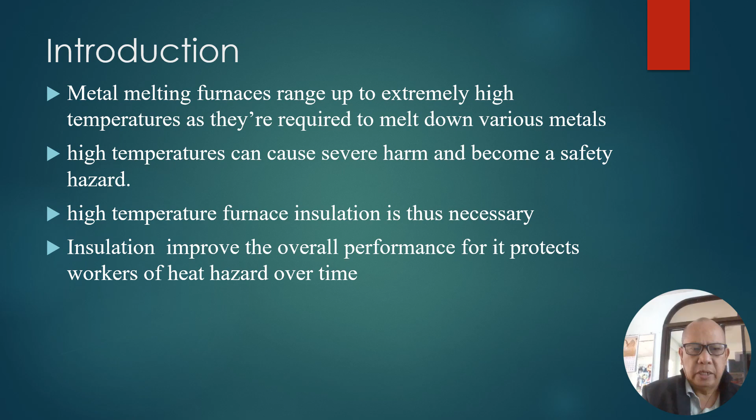Metal melting furnaces range up to extremely high temperatures as they are required to melt down various metals. High temperatures can cause severe harm and become a safety hazard. High temperature furnace insulation is thus necessary. Insulation improves the overall performance for it protects workers from heat hazard over time.

Coir, which is derived from the coconut, has some unique characteristics such as its resistance to seawater, microbial attack, high impact, etc. Its low thermal conductivity or high thermal insulating property makes it suitable for being used as insulators, although its main weakness was that it's easy to decay, but this can be solved by applying a treatment process.

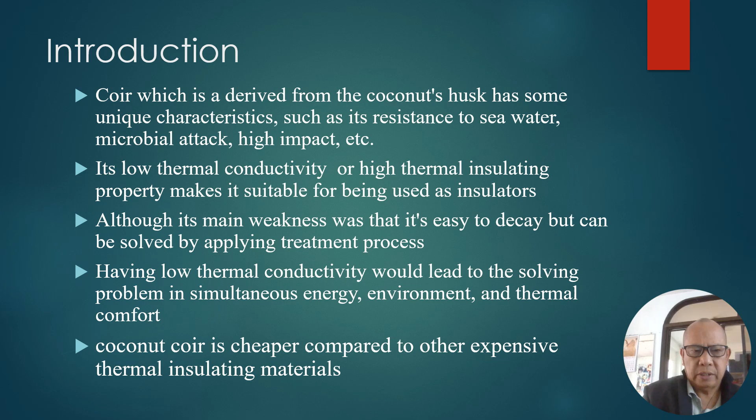Having low thermal conductivity would lead to solving problems in simultaneous energy, environment and thermal comfort. Coconut coir is cheaper compared to other expensive thermal insulating materials. The general objective of my study is to determine the effect of coconut coir on outside temperature and humidity of a mini metal melting foundry furnace when ignited with used lubricant oil as fuel.

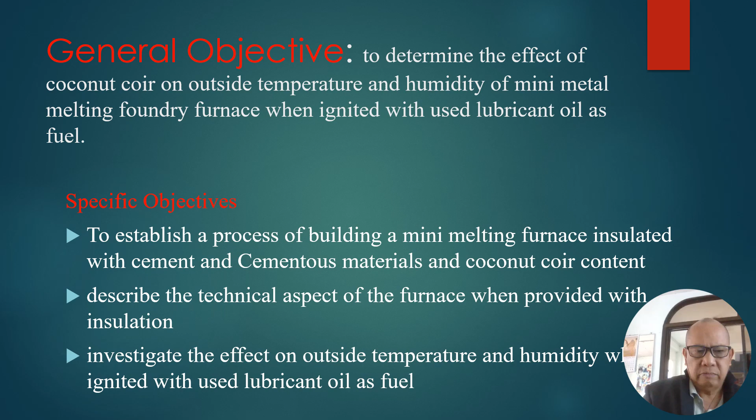Specifically, the objectives are to establish a process of building a mini melting furnace insulated with cement and cementous materials and coconut coir content. This describes the technical aspect of the furnace when provided with insulation. Then I investigated the effect on outside temperature and humidity when ignited with used lubricant oil as fuel.

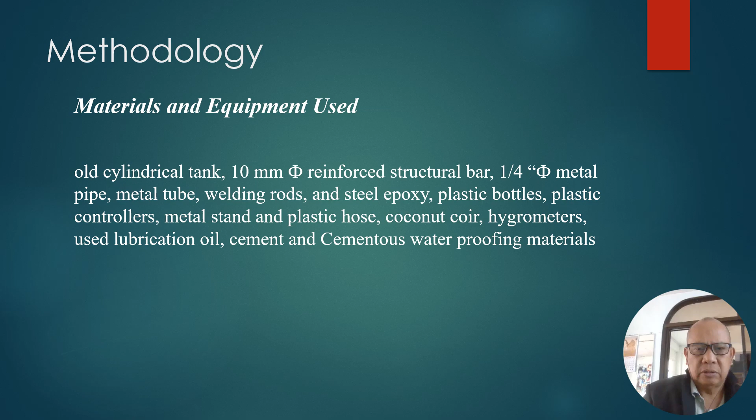The materials and equipment used are an old cylindrical tank, 10 mm diameter reinforced structural bar, 1/4 diameter metal pipe, metal tube, welding rods, and steel epoxy, plastic bottles, plastic controllers, metal stand and plastic hose, coconut coir, hygrometers, used lubricant oil, cement and cementous waterproofing materials.

The fabrication procedure and assembly are as follows. It involves cutting of the cylindrical tank to form the cylindrical structure of the furnace, cutting and welding of structural bars to form a stand and frame. The burner was provided with small holes and was attached to the metal tube, serving as the exit of the airflow. The airflow was provided by a small fan which is attached to the metal tube. The small fan has a control selector to produce air from minimum to maximum velocity.

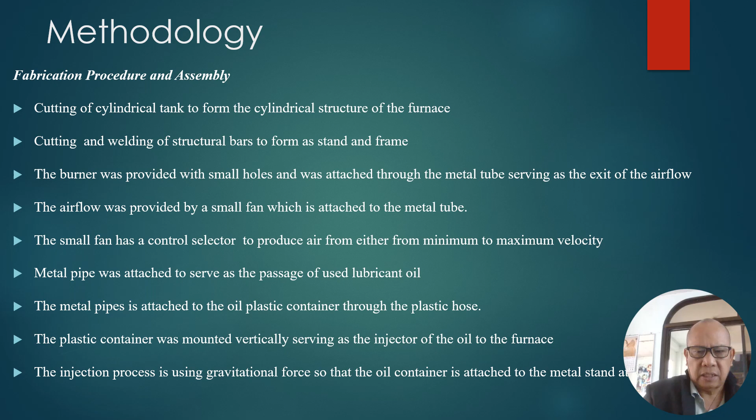A metal pipe was attached to serve as the passage of used lubricant oil. The metal pipe is attached to the plastic oil container through the plastic hose. The plastic container was mounted vertically, serving as the injector of the oil to the furnace. The injection process uses gravitational force, so the oil container is attached to the metal stand and the furnace.

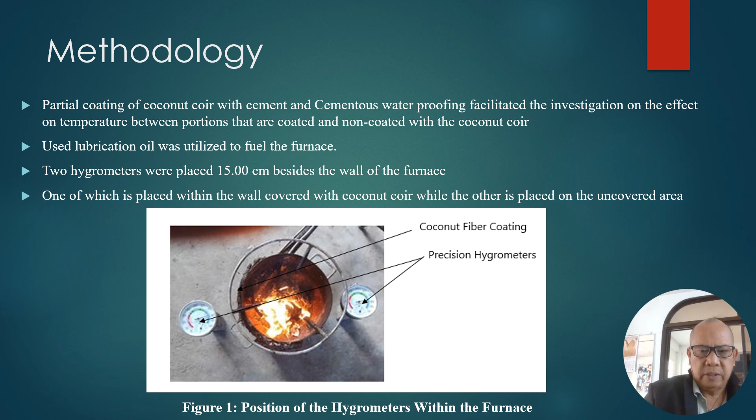Partial coating of coconut coir with cement and cementous waterproofing facilitated the investigation on the effect on temperature between portions that are coated and non-coated with the coconut coir. Used lubrication oil was utilized to fuel the furnace. Two hygrometers were placed 15 centimeters beside the wall of the furnace, one of which is placed within the wall covered with coconut coir while the other is placed on the uncovered area. So in figure 1, you will see the position of the hygrometers within the furnace.

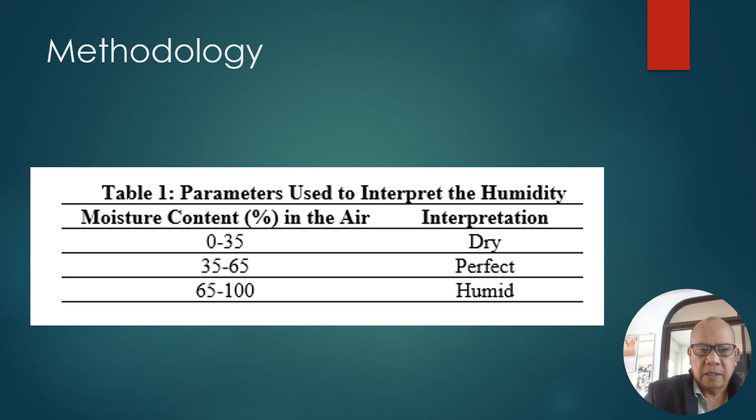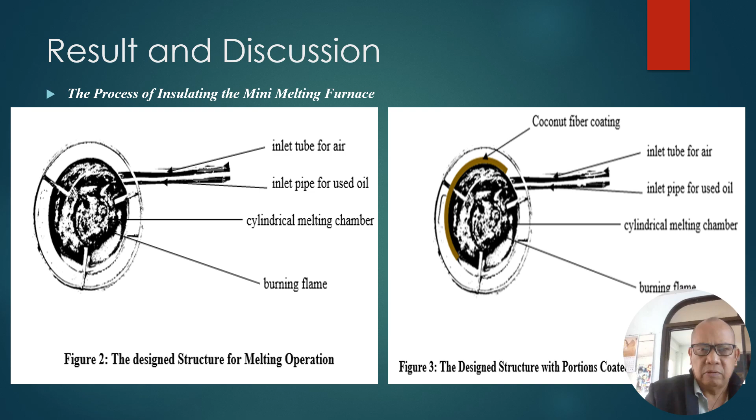So the process of attaching the portion of the coconut coir to the metal melting furnace involves the following. With coconut husk as the material, separate the coconut coir from the main bark and then separate more coconut coir to gather substantial coir suited to cover the targeted area of the metal melting foundry furnace, then clean it by removing dust particles. Using scissors, cut the separated coir into smaller lengths to facilitate the pasting of the coir to the metal furnace.

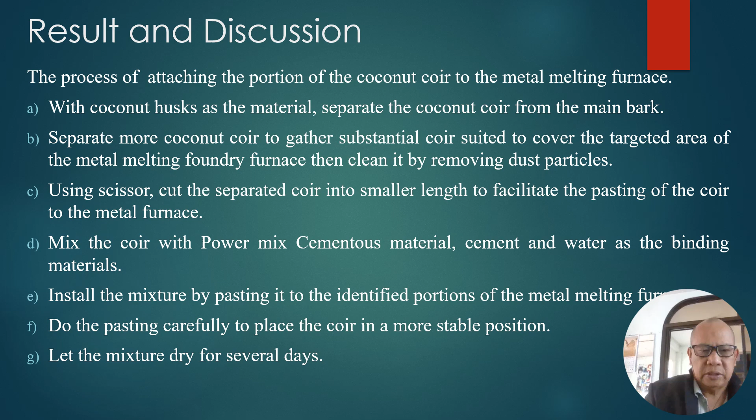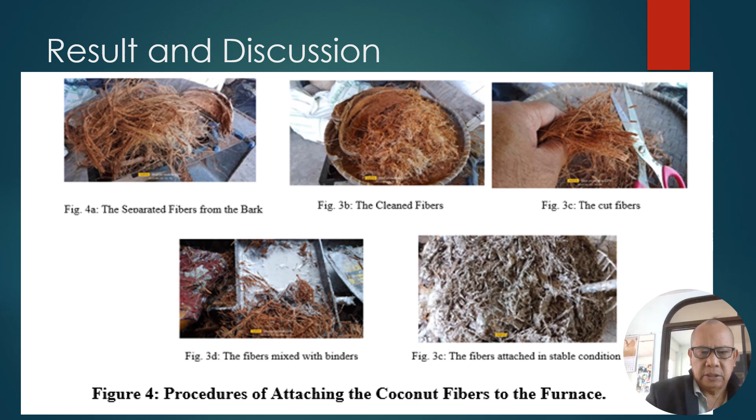Then I mix the coir with the power mix cementous materials, cement and water as the binding materials. Then I install the mixture by pasting it to the identified portion of the metal melting furnace. I do the pasting carefully to place the coir in a more stable position. Then I let the mixture dry for several days. So how the coconut coir was attached to the metal furnace is shown in figure 4, which shows the procedure of attaching the coconut fiber to the furnace.

Then the technical aspect of the melting furnace: insulating the equipment with coconut husk, power mix, and pozzolan cement as binder provides new features from the originally built mini metal melting foundry furnace.

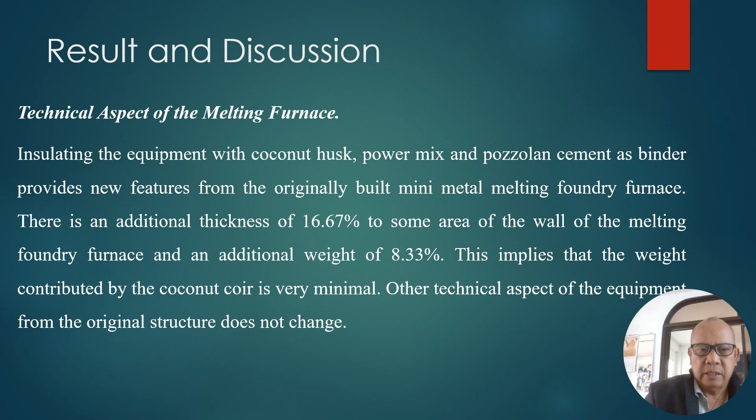There is an additional thickness of 16.67% to some areas of the wall of the melting foundry furnace, and an additional weight of 8.33%. This implies that the weight contributed by the coconut coir is very minimal. Other technical aspects of the equipment from the original structure do not change.

In gathering the data, I presented table 2 showing the effect on outside temperature using used lubricant oil as fuel. I started my observation at 2:05 p.m. And it shows that the temperature is 30 degrees Celsius. Then the humidity is 75. That is for the no cover part of the furnace, while for those with cover, it is 30 degrees Celsius in temperature, while the humidity is 79.

And then at 2:10, the temperature becomes 34 and the humidity is 66 for the portion with no cover, while with cover it is 32 for temperature and humidity is 74. So it shows there that there is an increase in temperature but decrease in humidity. The air is humid in both areas.

At 2:11, there is an increase in temperature with air in the non-covered area, and it is perfect, while the covered area is humid. There is an increase in temperature at 2:12, and the humidity becomes perfect in both areas. At 2:13 p.m., there is an increase in temperature. Humidity is perfect in both areas. At 2:15 p.m., there is an increase in temperature. Humidity is perfect in both areas.

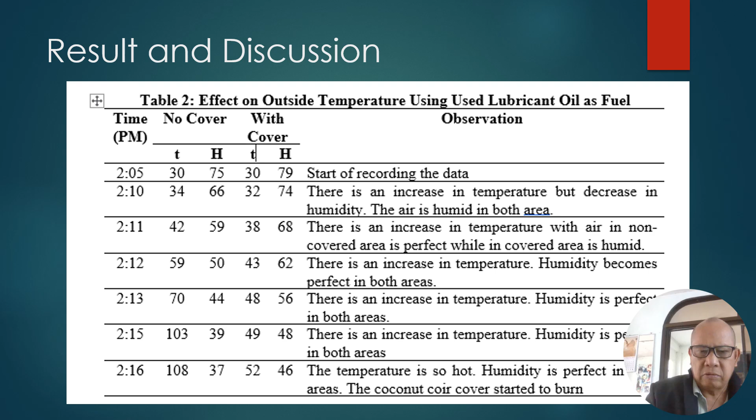At 2:16 p.m., the temperature is so hot that it reaches 108 degrees Celsius. Humidity is perfect in both areas. Then the coconut coir cover started to burn.

Now, on figure 5, I show there the graph of time versus temperature. T sub 1 represents the temperature for the portion of the furnace with no cover, and the violet color is T sub 2, that is for the portion with cover. Now, the linear equation for T sub 1 is y equals 14.286x plus 6.5714. If we differentiate that, the equation becomes dy over dx equals 14.286. So that equation represents the rate of increase of the temperature for every recording.

Then the linear T sub 2 equation is y equals 3.9286x plus 26. If we differentiate, the equation will become dy over dx equals 3.9286. So it shows that the increase in temperature for the portion of the furnace which is not covered by the coconut coir is higher as compared to that portion which is covered by the coconut coir.

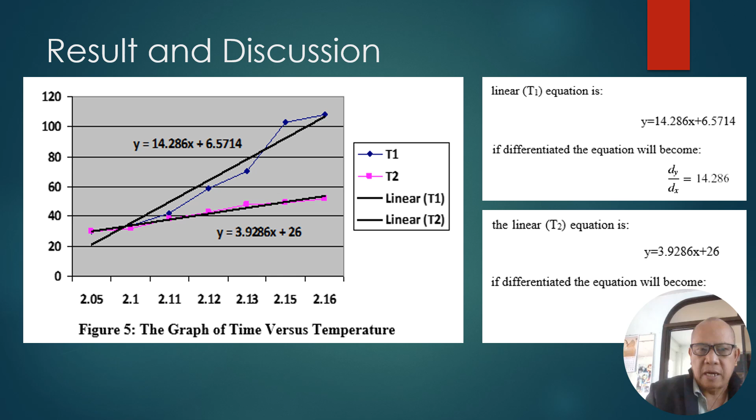Now for the humidity, I presented there figure 6, the graph of time versus humidity, in which H sub 1 is for the portion of the furnace not covered with coconut coir, while H sub 2 is for the portion covered with coconut coir. So the linear equation for H sub 1 is y equals negative 6.5357x plus 79. If we differentiate that, the equation will become dy over dx equals negative 6.5357. So that equation represents the rate of decrease of humidity in terms of time, for the portion not covered with coconut coir.

Now for the portion covered with coconut coir, we have the equation y equals negative 5.8214x plus 85.143. So if we differentiate that, dy over dx equals negative 5.8214, which represents the rate of decrease of the humidity for every recording.

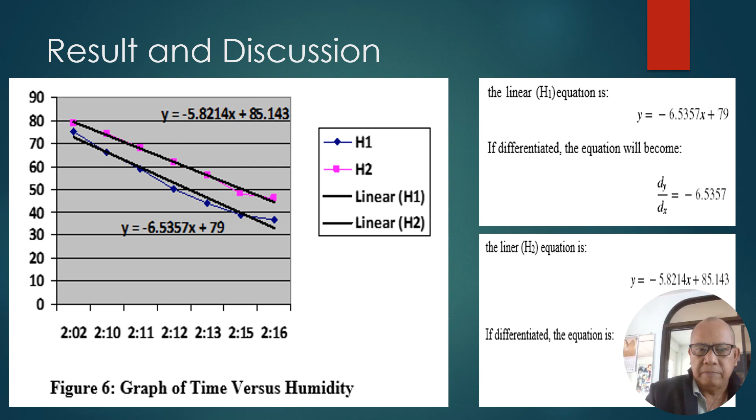So, conclusion, the mini metal furnace was constructed by incorporating an additional element into the apparatus, which was used to investigate the effectiveness of coconut coir in regulating the dispersion of high temperatures beyond the equipment. This involved applying a partial covering of coconut coir with cement and cementitious waterproofing to examine the impact on temperature and humidity in areas covered and uncovered by the coir.

Coating the mini metal melting furnace with a mixture of coconut husk, power mix and pozzolan cement introduces new features. Some areas of the furnace walls adjusted to a 16.67% increase in thickness and an additional weight of 8.33%. The total weight attributed to the coconut coir remains negligible. Other technical features of the furnace aside from these changes remain unchanged from the original design.

During a brief period of burning, using used lubricant oil as fuel in the metal furnace, it was noted that the outside temperature increased more rapidly in areas without coconut coir coverage compared to those covered with coir. Additionally, humidity displayed a more rapid decrease in the uncovered sections than the sections protected by the coir. However, the coconut coir coating ignited at extreme temperature and perfect humidity in air.